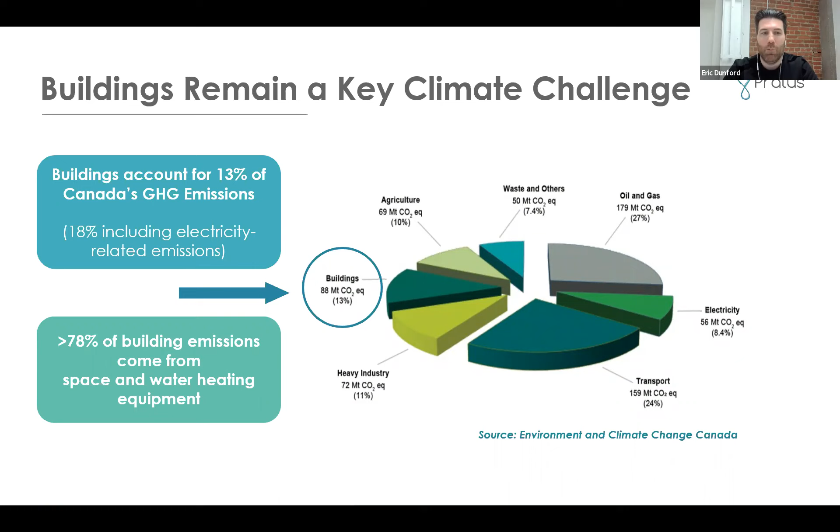So first, why is this important? Well, in Canada, buildings continue to be a very significant source of emissions. Nationally, we're looking at about 13% of overall emissions. I would say Canada has kind of a disproportionate percentage here, smaller than it is in other countries, and that is due to our larger oil and gas sector, which you can see at the upper right-hand side. So this number is seemingly smaller than it actually is in impact for other nations. Also, when you look at buildings, where the emissions are rising from, they're coming mostly from heating requirements. We are a cold country, surprising nobody.

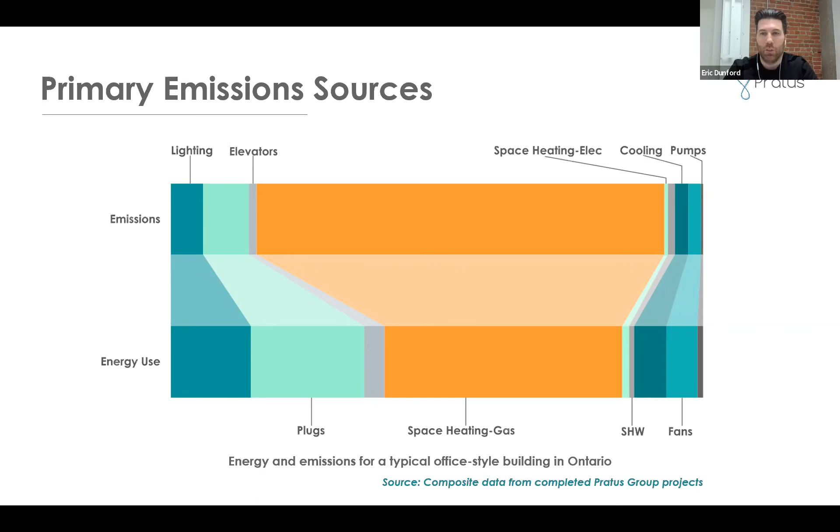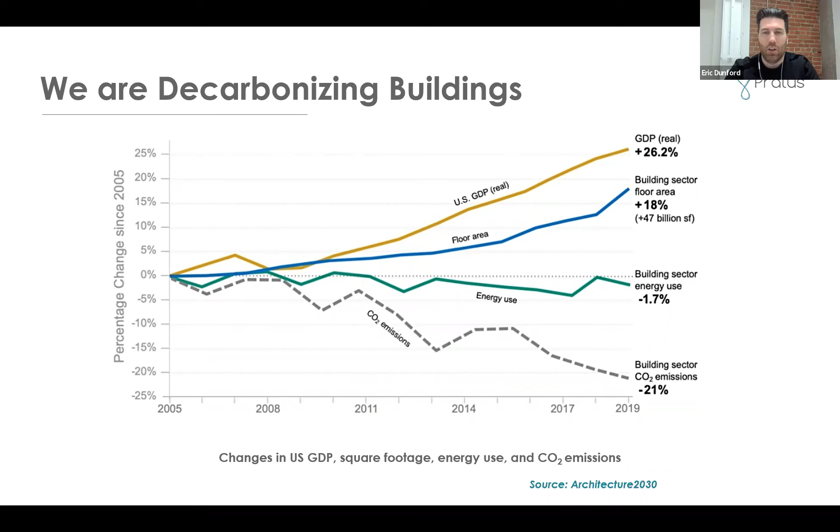If you think about 2005, things like LEED were really just getting off the ground. Over the past 20 years or so, we've seen a very big explosion in the science and the art of designing better buildings. So that's a good thing.

From a policy perspective, all of you on the line are joining from municipalities, so this is probably a world you're living in far more often than we are. But across the board, we're also seeing a corresponding increased focus on emissions reduction. In Canada, we have a federal target for net zero emissions nationally by 2050, and an interim target for 2030 targeting a 40% reduction.

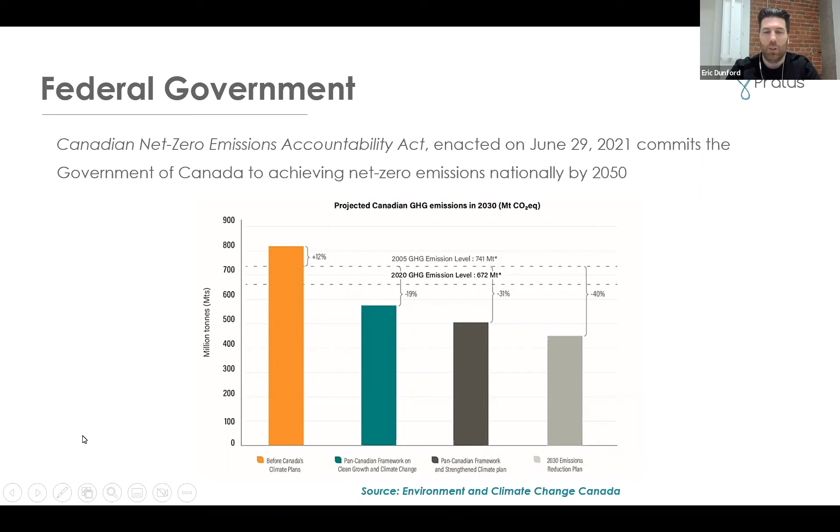You can see that graphic here, coming from the federal government. There are a number of different items in play pushing our overall economy towards that lower carbon future. Probably the most important, and probably the most painful, is the carbon pricing regime that's been implemented. We currently have a carbon pricing scheme in Canada that is national, and the numbers affixed to a ton of carbon are scheduled to rise very rapidly between now and 2030. This is the law of the land. For provinces that don't have coverage of all emission sources, the federal program does backstop, maintain, and enforce that requirement regardless. So all provinces in Canada are subject to this, and it's affecting a lot of innovation and decision making as that price of carbon starts to rise very rapidly.

Provincially, we're looking at a couple of things more on the mechanical side, in the sense that we're looking at regulations requiring public agencies to report on energy consumption and disclose that information publicly. There are two regulations here that focus on requiring public entities to talk about their emissions and energy consumption publicly, and to talk about strategies or programs being developed and utilized to pursue reductions over time. My sense is many of you on the call will be very familiar with these items, as they may be part of the roles you're playing at local government.

This is currently an interesting political dimension in Ontario, but importantly, we're also seeing different cities deploying their own green standards or carbon emissions reduction targets for all buildings in their jurisdiction. The most established, most well-known of these are in Toronto and Vancouver. Toronto is obviously more relevant for us here in Ontario, and the City of Toronto has established a goal of 2028 for new buildings to be designed without any emissions whatsoever, and 2040 as the target year for all existing buildings to reach zero carbon performance.

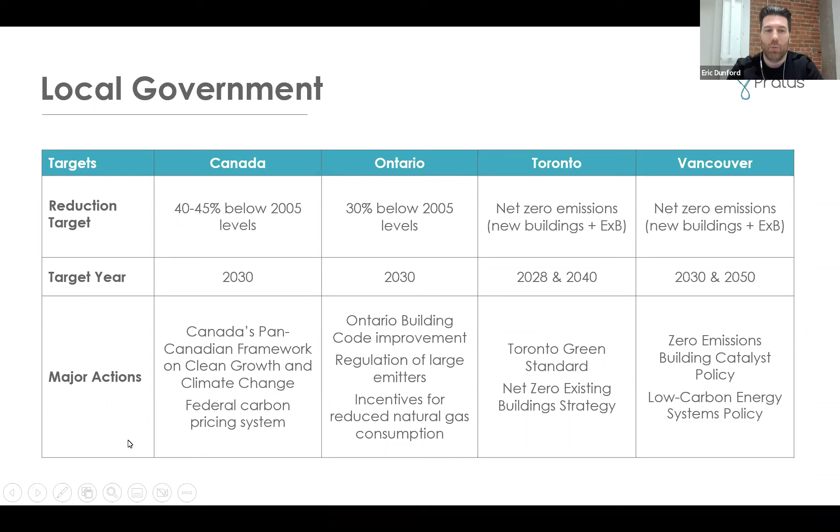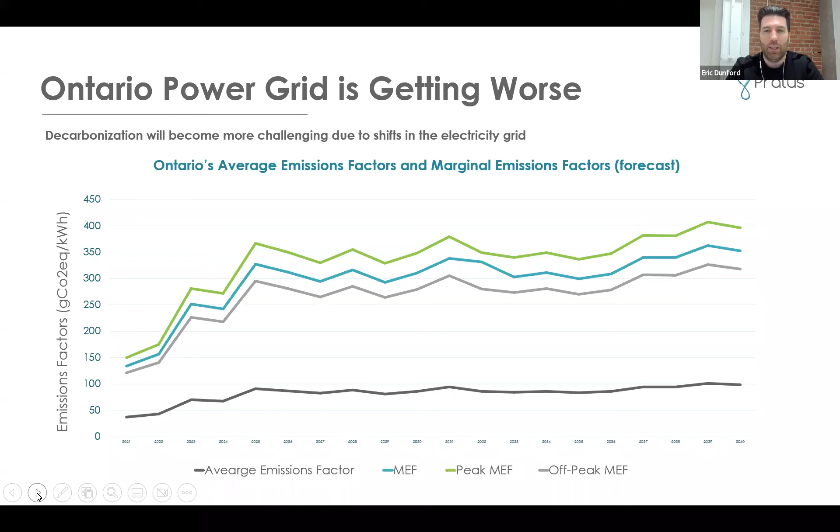Unfortunately, here in Ontario, we have an added challenge in that we have long relied on our power grid to be low carbon and to provide us plentiful energy at a low impact from an emissions perspective. What we are expecting in the future is that our power grid in Ontario is actually going to become more emissions intensive. That is because we have disruptions with nuclear facilities that need to be renovated, retrofitted, or expanded upon, and we are going to be forced to rely more on things like natural gas as a stopgap. So that's just something to be aware of—the electricity grid is also changing.

So I'm going to pass it over to Oleksandra to talk us through some of the tips and tricks and the terminology here when we talk about net zero.

Thanks, Eric. Before we start talking about decarbonizing our buildings, it's very important to get agreement and understanding on the terminology used in the industry. So I will go through some of the terms and definitions that we have, so we have a common language that we're speaking to. The first term I wanted to discuss is greenhouse gas intensity, or GHGI.

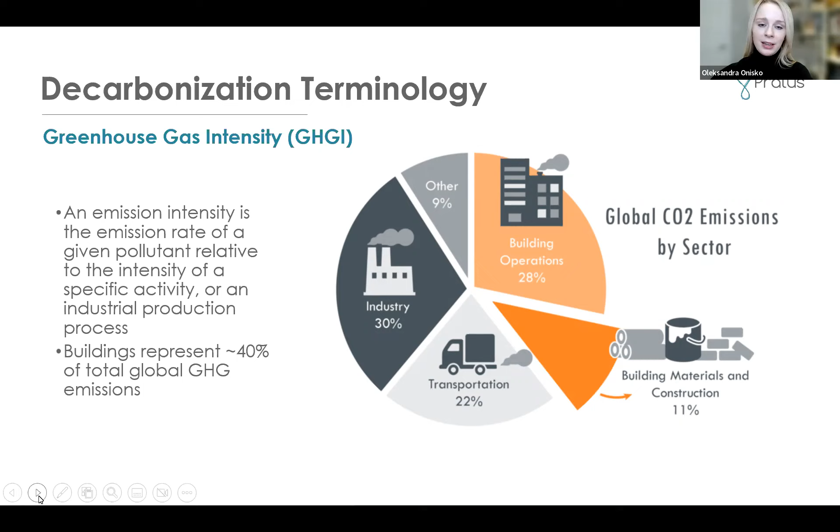Essentially, GHGI is a reflection of how emissions intense your building is. It's a combination of two factors: how much energy your building is consuming, but also what fuels are being used to meet those energy needs. As Eric alluded to, our grid is very clean in Ontario, so the more electricity we are using, the lower emissions our building has, and the more gas we are using, the higher our GHGI will be.

The second term we wanted to talk about is the total energy use intensity, or TEUI. It's referred to in different ways across industry, but this metric is the most universal of the three we're discussing. It's the one you will use for benchmarking—if you're looking to compare your building to similar buildings in a similar climate, this is the metric you use. It's a reflection of how much total energy your building uses over the course of the year, divided by the area of the building. It's a great metric because it includes every single end use, such as space heating, pumps, cooling, plugs, and any renewables you have.

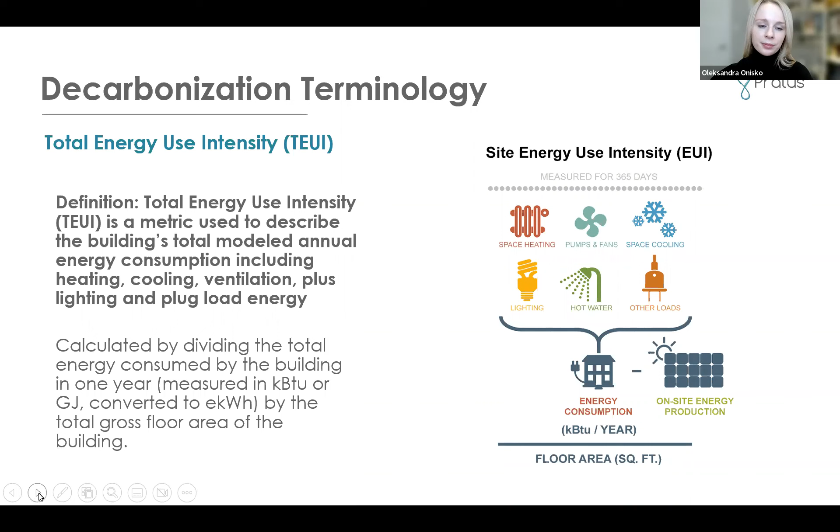But it also means you can take credit for reductions in every one of these categories. The last metric we wanted to mention is the TEDI, the thermal energy demand intensity. The TEDI is a little bit newer, and it's been widely used in Vancouver as well as the City of Toronto. It's a reflection of the heating demand your building has, and it's a reflection of two things essentially: how efficient or inefficient your building envelope is—the more heat loss you have, the less efficient your envelope, the higher your TEDI, because you're increasing the demand for heating. The second item it reflects is the ventilation in your project: how much ventilation you have, whether you're recovering it, controlling it, and so on. It's an interesting metric to balance with air quality and occupant comfort—more ventilation is great for air quality and things like infection prevention, but it does increase your TEDI if you're not treating it.

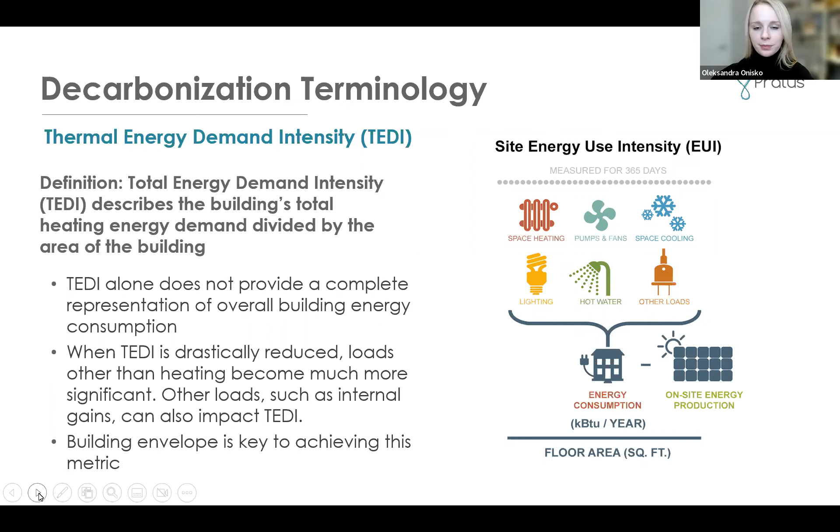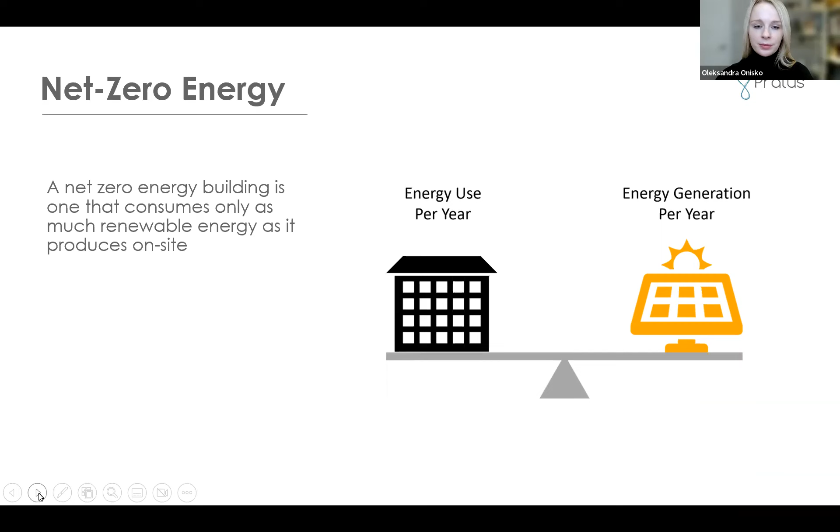Okay, so before we get into decarbonizing our building, let's talk about what the different net zero carbon and net zero energy terms mean as well. Often you hear net zero used interchangeably, and it's difficult to tell without context what that's referring to. So let's talk about some of the terms most frequently used in the industry, starting with the most stringent metric: a net zero energy building. You won't see too many of these around—a net zero energy building is consuming as much energy over the course of the year as it is able to produce on site through renewables for that particular project. Now we have a net zero emissions building, or a net zero carbon building.

This one is gaining a lot of popularity. And when you hear net zero in the context of municipal buildings and other projects in Canada, this is typically the standard that is being referred to. So a net zero emissions or carbon building is a very efficient building that starts off with a low carbon factor associated with it. But the building also produces either on-site or procures carbon-free renewables off-site to offset the annual carbon emissions. So you can think of it, you may be producing some energy on-site to offset your consumption, but if you can't produce it all on-site, for this context, it's okay. You can offset that through purchases.

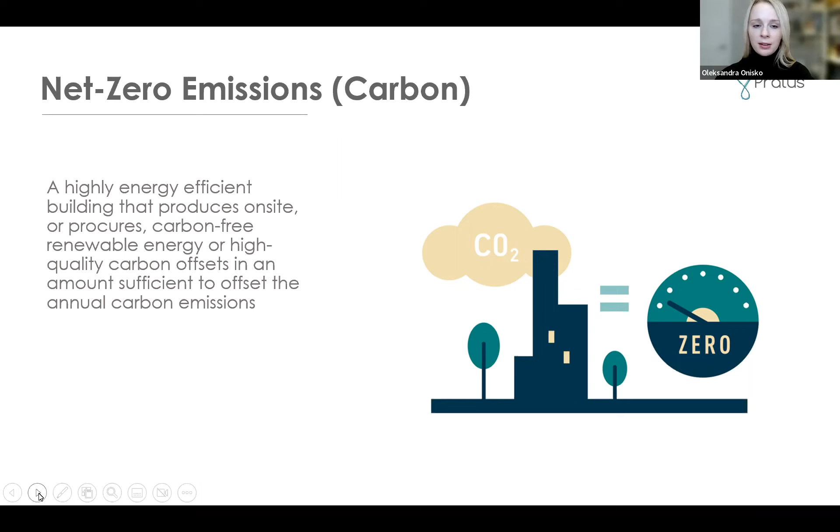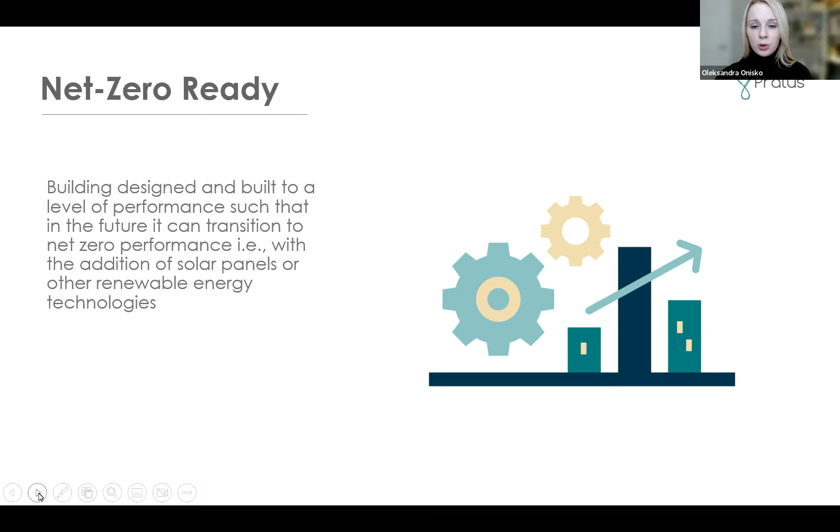And the third definition is net zero ready. So this one is a little bit more loose, but it is essentially still a very energy efficient building, but for whatever reason, it cannot reach net zero energy or net zero carbon, but it can with a future transition plan. And that future transition plan can look like eliminating all gas-fired appliances from the building, or it can look like installing some solar panels or other renewables on site just to get to those other targets.

So the most frequent standard that is used for evaluating net zero carbon buildings in Canada is the one published by the CaGBC. And the core of that standard is the achievement of a net zero balance. So this means that the net zero emissions for the building, however you balance it, will have to be zero. And this includes anything from embodied carbon, so your upfront carbon, all the carbon that's involved in the manufacture, construction, and decommissioning of your building. Your operational carbon, so that you can think of that as your utility bills, and that includes your direct as well as indirect emissions, minus any avoided emissions. So again, anything you're producing on site, as well as anything you're procuring off site to achieve that net zero balance.

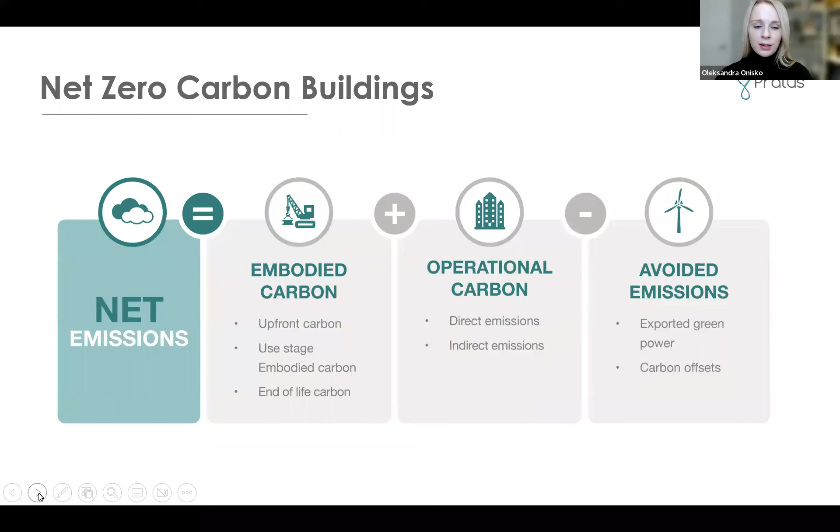And I'll turn it over to Eric to talk about some of the rationale for action. Great, thanks, Oleksandra. And yeah, as you can see, net zero means a lot of things. So being very specific here, what we're going to talk about today is net zero carbon buildings. So as Oleksandra said, you can imagine trying to supply all the energy on a site is difficult if your facility is large or if it has a very significant power draw. So we're really here talking about net zero carbon, not net zero energy, though that is a very valid and important topic as well. But let's turn our attention here a little bit to, why is it important for cities to act on existing buildings?

Well, one, as you will likely know, when you look at the general assets that cities have, their primary sphere of influence is going to be around operations that cities control. So we often hear these called corporate facilities, corporate buildings, corporately owned. And what that means is these are the buildings that a city actually has under its control and ownership. So think about things like libraries, City Hall, maybe community centers, recreation centers, parks, those sorts of things. These are assets that the city really controls without a lot of other stakeholders involved. Now, this makes them really good targets for climate action because you can do things on your own without permission from others, without necessarily disrupting or having to consult stakeholders. And that's really important. So municipal services really here are a key target for action that can be taken quickly and can be done efficiently today.

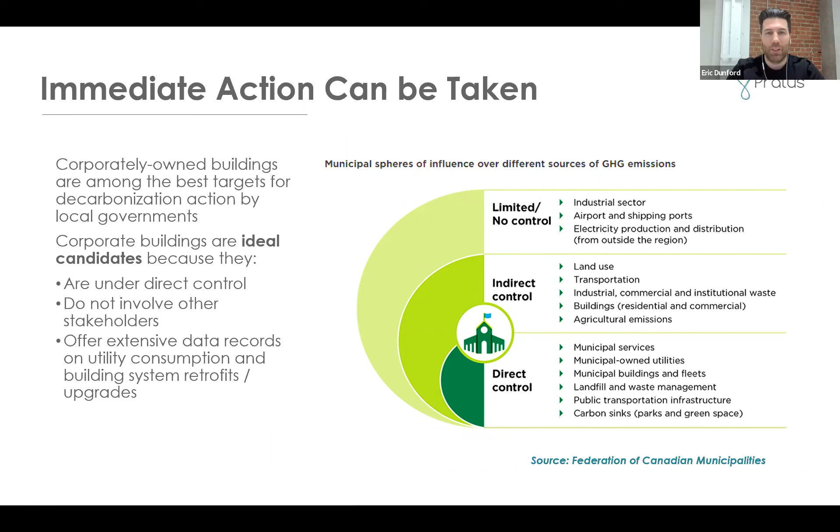So existing buildings are really critical for cities to start with because they offer a really rich target for emissions reductions. And they offer a good learning opportunity and environment where you can start to look at developing capacity internally. The other good thing about existing buildings that cities control is they typically have very good records because cities keep good records of how their facilities are maintained, what kind of energy consumption they have. So when we look at strategies for potentially decarbonizing them, all of that rich data is on hand and available for professionals to look through and to advise on. The private sector outside of all of this is much harder to influence, as we all know. So we're really focusing today again on the municipal sphere and where effort can be best applied.

And this is really important because I want everybody to understand one thing here is that most buildings that will need to be decarbonized exist today, right? So if we talk about net zero by 2050, most of our challenge, most of our problem is already in the ground. It is the buildings that are drawing power, that are burning natural gas today.

And what a lot of studies have shown is that even if we were to switch over to net zero new construction for all buildings, as you saw with the city of Toronto targeting 2028 for that, it's not going to do enough to decarbonize the overall building stock. We have to do this for existing buildings.

And in British Columbia, they did a study where they looked at what the impact of their stricter building code requirements would be for new buildings. And they found that even with these very strict new programs coming into place that would govern construction of all of these new buildings that are going to be built in that province, they might only achieve about a third of the overall reductions that they need to achieve in the building sector.

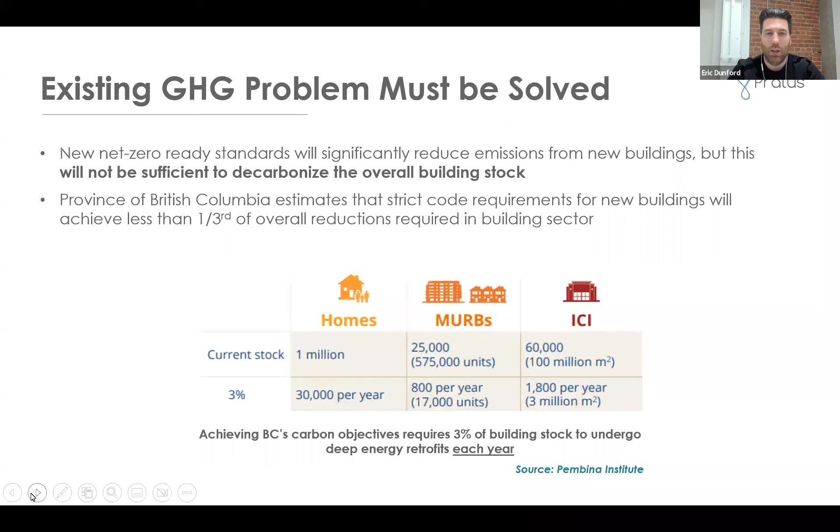And the other thing here is that, as public entities, the public sector does have an interesting role to play as somebody who is setting the example again. So we want to talk about influencing the private sector or the community. Public buildings are very high profile. They are accessible to all, and they are representations of community values and overall policy objectives.

So these buildings, because of being highly visible, being accessible to many, their performance can set a very important standard for other parts of the community and other developers or other property owners. And this far outstrips the percentage of their contribution.

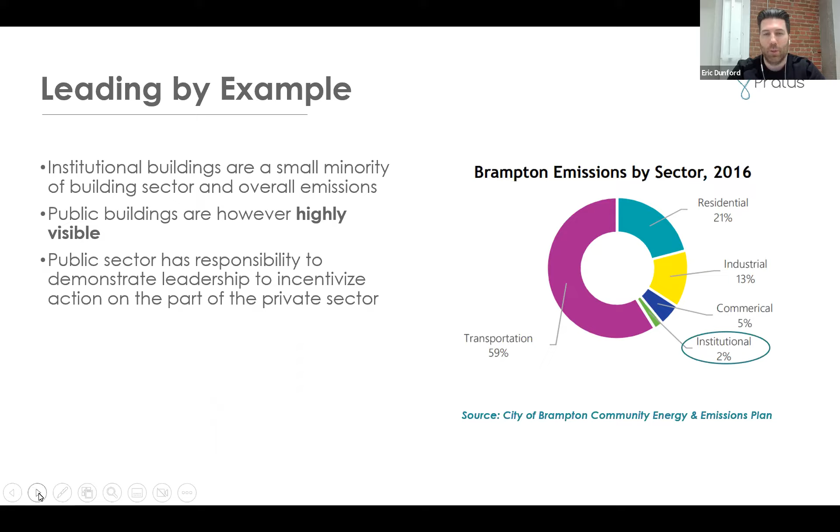So that's really what we're here to talk about and why we see this as such an important part of municipal action. So Oleksandra, why don't you walk us through the actual methodology? We've talked a lot about the why and the what and the terms. Let's walk through what this actually looks like in practice. Yeah, absolutely.

So the task of decarbonizing a building may seem daunting, particularly if you're looking at a portfolio of buildings and you're trying to establish a strategy and a roadmap for how you will approach this. So we've identified 6 key steps that are generally taken when we are looking to decarbonize a portfolio or a group of buildings. The number 1 step is to determine which buildings we need to focus on.

So assessing your portfolio. Different buildings in your portfolio may have very different emissions. You may find that 80% of your emissions are actually coming from only a handful of buildings. So that analysis will give you the tools to make your decisions in the next steps. So once you identify your high priority buildings through assessing the portfolio, it's very important to start building a business case for these retrofits and decarbonization strategies. We'll talk a little more about that in the next few slides, but let's just cover the rest of the process.

The next step is typically studying the options. So once you've identified your building, you've sold the business case to the stakeholders that need to be sold on it, we're figuring out, okay, what are we actually going to do? So typically consultants are engaged and brought in, mechanical, electrical, architectural, sustainability consultants, and they are assessing the different options that you have for the decarbonization strategy.

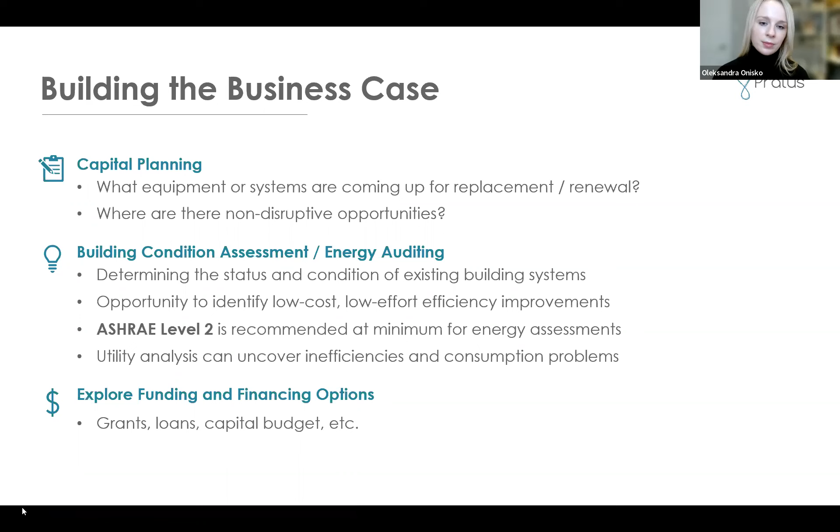Okay, so let's talk about what a study looks like, because again, this is a very important part of a decarbonization strategy. It really gives you the roadmap of what actions you have to take, when you have to take those actions, as well as how much those actions will cost for your particular building.

So in every single study that is undertaken, it's very important to establish the goals. The goals may be different based on your particular project. It may be different based on the municipality. It may be different based on the particular use of the building. There's different priorities that have to be weighed, but starting with a common set of goals for the project is essential in any decarbonization study.

The second step is making sure you understand the building in detail. So that can look like site visits, extensive document reviews, interviewing the operators, interviewing the stakeholders for the building, as well as the occupants. And that will all be taken by your sustainability consultants, and they will develop essentially a digital twin of your particular project. And your project can be either a single building or it can be a group of buildings.

And what is done in that case when we're creating a digital twin is essentially a calibrated energy model that reflects how your building is built, how your building is operating, the various efficiencies that you have in your building. So it's a representation of what you're working with.

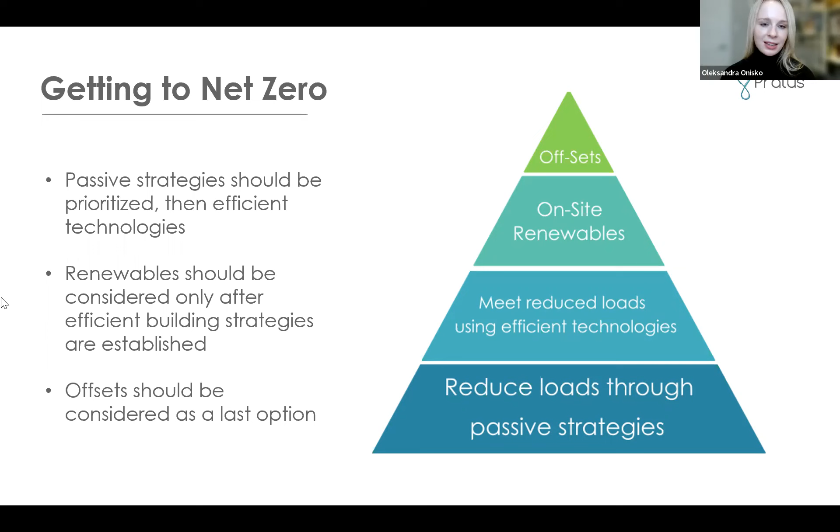Reducing the loads through passive strategies is the number one biggest influence you can have on your project. This should be the basis of every decarbonization project, and it will look different depending on what you have in your building. The number one method is to address your massing, which may not be possible if you have an existing building because it's already in place. Things such as orientation, building shape, and the site—you may not have influenced that for an existing project. However, for new construction, this is of paramount consideration when establishing our approach.

However, things you can influence in an existing building include your building envelope. We reduce loads through the building envelope by insulating it more, having better thermal bridges, and making sure we address any infiltration issues, so that our building and mechanical system does not have to meet a ridiculously high building load because we have not addressed the number one item of importance, which is our building envelope.

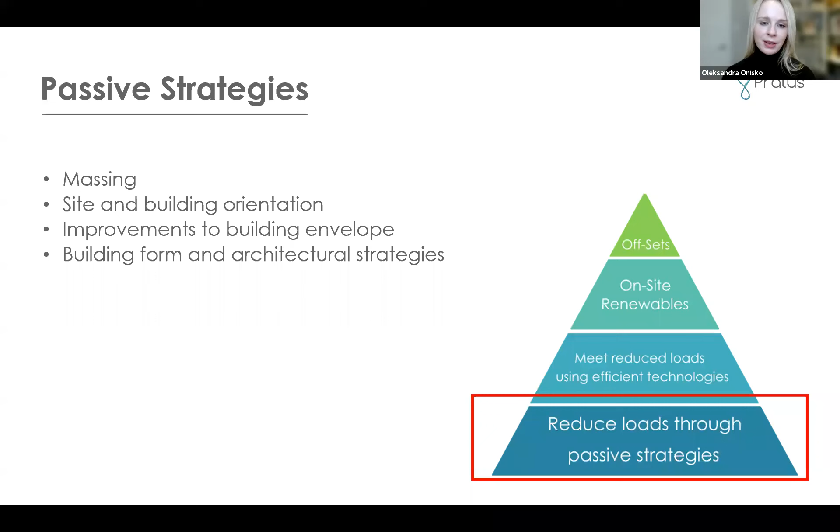So I mentioned insulating, which I think, when you're thinking about the building envelope, is the number one item people think about. They want to add more and more insulation. However, that's only one portion and aspect of thermal performance of the building. The other aspect that has been frequently ignored is the thermal bridging effect. You may look at a wall and hear that it has an R value of 20 or 30 or 40. When people mention those values, those are typically nominal insulating values.

So that's essentially you put in some rigid insulation in there, and that's the value it would have if it existed in isolation. Unfortunately, this is not what our building envelope looks like in real life. We have many interruptions to the insulating layer in the real building—things such as studs, fasteners attaching your cladding systems, breaks in insulation, and linear interfaces such as your window wall transition, balconies, slab edges, and parapets. All of these are opportunities for energy to escape your building because we have a discontinuity of insulation.

So when we talk about decarbonization strategies, it's important to think about these in conjunction with how much insulation you're putting in, but also how you're addressing these thermal bridges. This is something your architectural consultant, building science consultant, or sustainability consultant can help you with. And it doesn't necessarily mean high cost premiums—sometimes it just involves careful detailing of how we are approaching the design.

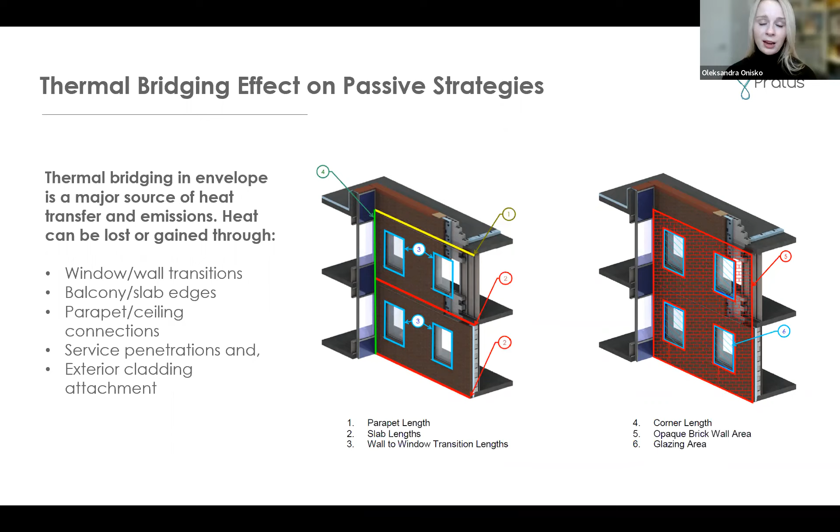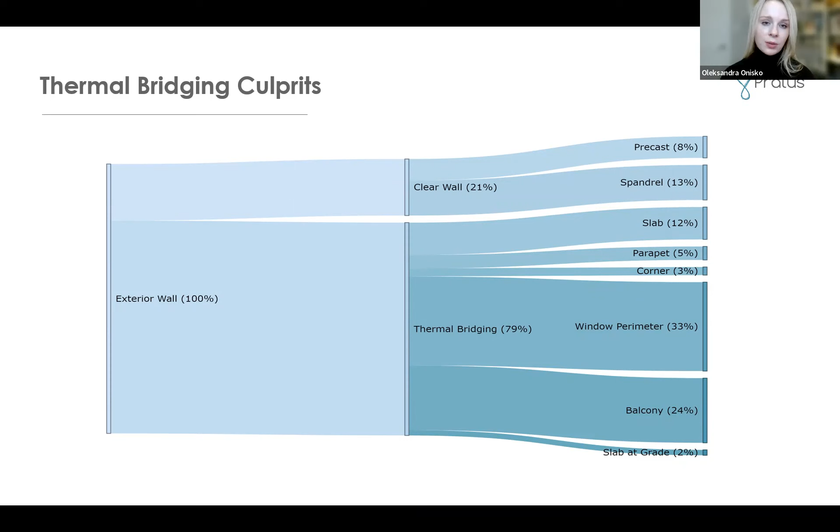The second step, after we've reduced our loads through these passive strategies, is to meet these hopefully much smaller loads with very efficient technologies. What that looks like will differ based on the loads you have, but generally it's addressing the active systems in your building, such as your mechanical systems.

Typically what we look at is replacing natural gas-fired equipment with heat pumps of all types—air source, ground source, sun source—trying to recover any energy from outside the building and bring it inside as much as possible.

Replacing our domestic hot water with more efficient equipment is also important. For decarbonization strategies, that often means changing gas-fired equipment out for heat pump systems—again, air source, ground source, sun source. This also looks like improving our building automation and control systems, which is very important. As we like to say in the industry, the most efficient system is a system that doesn't run. If you have the ability to control that within your building, if you have variable occupancy or rooms not occupied all the time, there are opportunities to shut down mechanical, electrical, and other systems in response to that decrease in load. There's a lot of opportunity within building controls to gain efficiency.

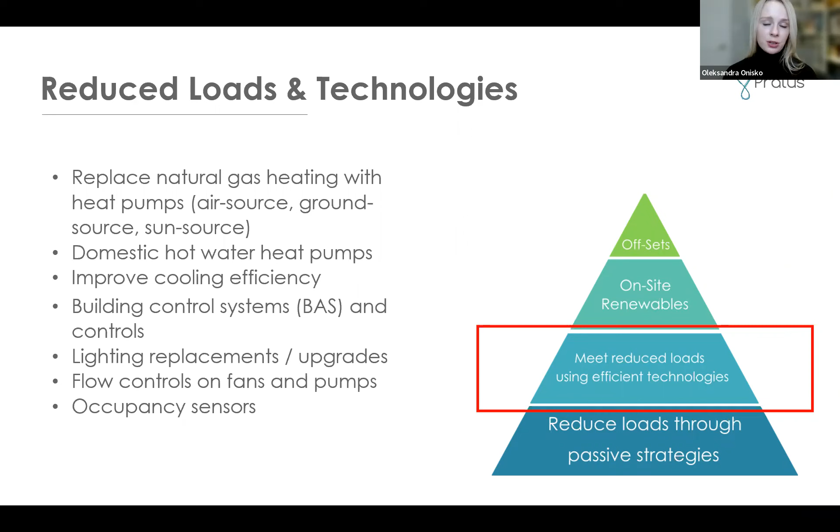So one item we wanted to talk about again is the resources available for these technologies. We've flagged the City of Toronto Net Zero Existing Buildings Strategy as one resource that outlines some of the common technologies used in decarbonization strategies, as well as their typical impact in reducing carbon and the typical costs associated with it.

Things like that are really good rules of thumb and quick guidelines to refer to on projects when looking at suggestions on how to best approach technology and efficiencies in your building. One item I'd like you to take away from this presentation is heat pumps, heat pumps, heat pumps. If you remember anything for mechanical systems, this is key. These technologies come in different shapes, sizes, forms, and methodologies depending on building size and application, and they have the opportunity to drastically improve your emissions.

So the primary method they do that is, number one, they fuel switch. Instead of using combustion equipment to generate heat, you're essentially taking heat from one source and moving it to another, possibly increasing the degree of heat, and you're using electricity to do that. So it's two things happening at once, and the result is much better performance in terms of energy and carbon, and frequently lower operating costs as well.

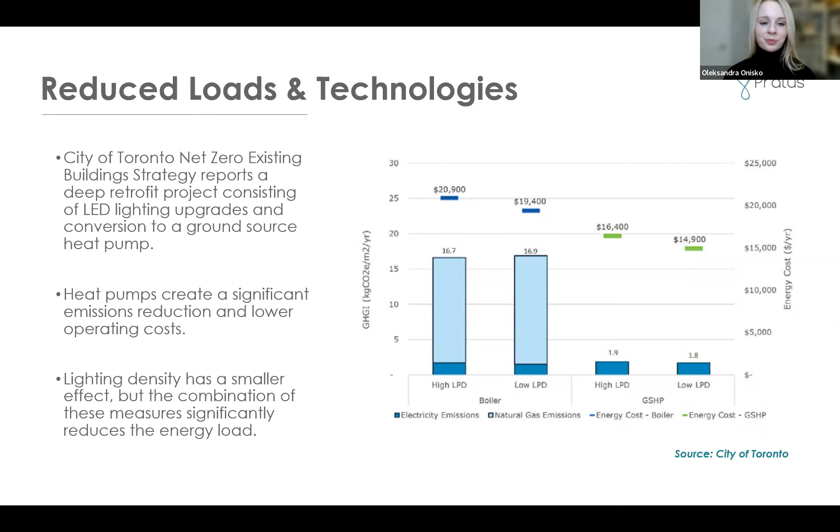Okay, so the next item we address once we've reduced our loads and met them efficiently is on-site renewables. On-site renewables will look different depending on your project, but I'd say 95% of the projects we work on, it's solar PV. Now we're not only seeing solar PV on the roof, but also in parking structures, as projects look to meet more of their energy needs through on-site renewable generation. We're looking beyond the roof to what can be done with parking structures.

One technology we've seen emerging is building integrated photovoltaics, where you use the vertical surfaces of your walls to generate electricity. That technology has come a long way, and it's great to see it picking up in the industry. Other sources of renewables on site are non-traditional ones, such as solar water preheat, solar fresh air preheat, renewable natural gas—which isn't widely available depending on locality, but is an option for some projects—as well as wind turbines and geothermal systems.

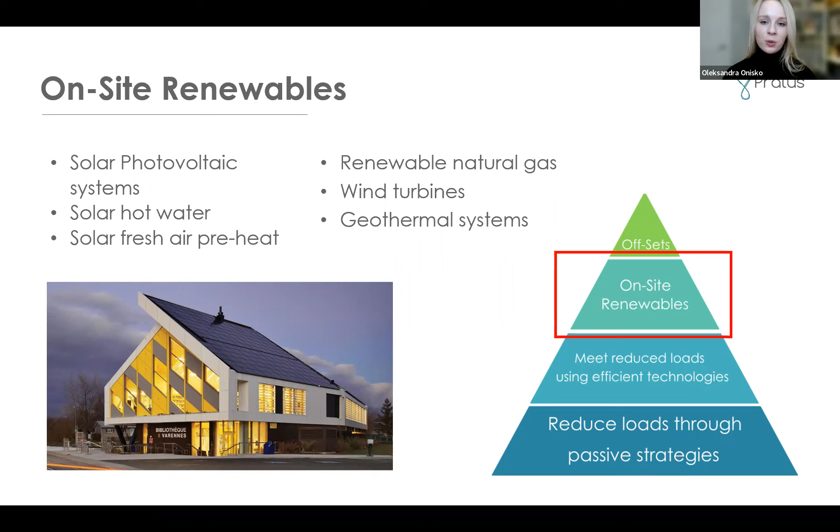And the cherry on top of this pyramid, as we like to say, is our mechanism of last resort. Once you've exhausted all your strategies from the previous three rungs of this pyramid, this is the last one you'll be looking at: the purchase of offsets or credits. This is a financial commitment you'll make for the life of the project to essentially meet that net zero carbon balance on an ongoing basis.

There are a few options for this. You can either purchase offsite renewable energy generation—think of the more common ones, like Bullfrog. You can even buy that for your house, so that's an option, and there are a few different providers out there you can purchase this from.

You can also pay money in exchange for carbon removal technology, essentially giving someone funds to invest in a carbon sequestration project somewhere not on your site. Or you can fund forestry projects and other natural carbon sinks—think of this as paying someone to plant an acre of forest to offset a certain amount of carbon for your project that year. So there are different options available.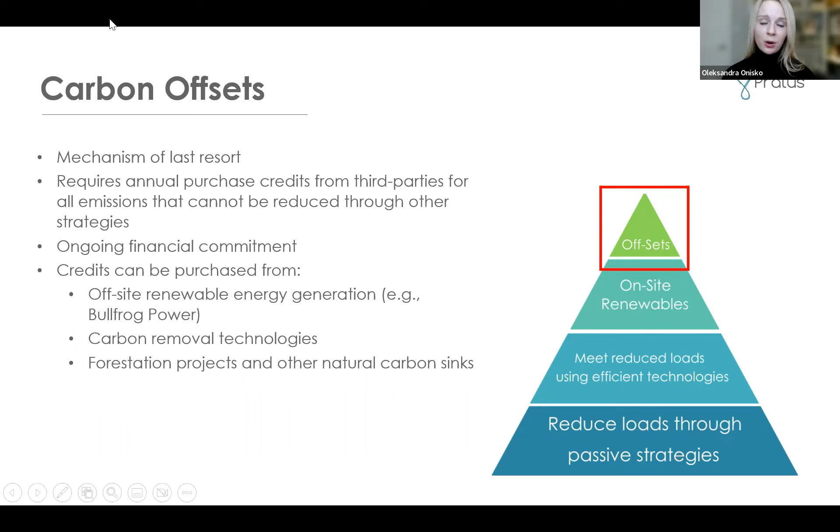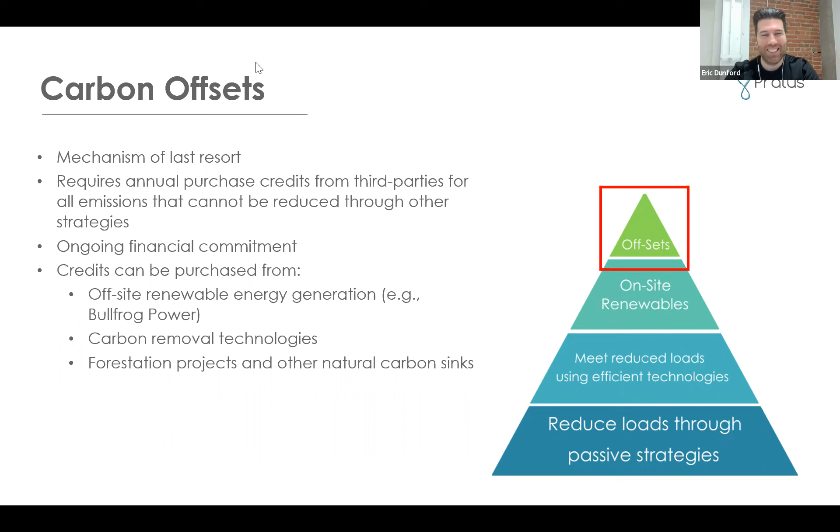Okay, so that was a lot of material to cover, but what we want you to take away is these best practices. This is sort of the cheat sheet to decarbonization for any building.

Number 1 is reduce your loads through building envelope improvements, more insulation, better thermal bridging, addressing infiltration. Number 2 is implement energy recovery ventilation and demand control ventilation on your fresh air loads. This plays a part in reducing our loads. We want to make sure we are addressing our ventilation loads, which are very high in a heating dominated climate. We have to heat every CFM or cubic meter or cubic foot of air that we bring into our building, so any way we can reduce that is fantastic.

The third item is to implement a low carbon mechanical system. This is heat pumps, heat pumps, heat pumps. If you remember one thing, this is it. And not to be forgotten is retro and recommissioning of the existing system and commissioning of new systems. You can implement any system you would like, and it can be the most energy efficient system, but if it is not operated properly, if it is not balanced properly, is not set up properly, your system will not deliver the energy savings that it should. So it is extremely important to recommission and retro-commission any existing system, and also to have commissioning on any new system being installed. And the last item is any renewable energy generation you can put in on site is great.

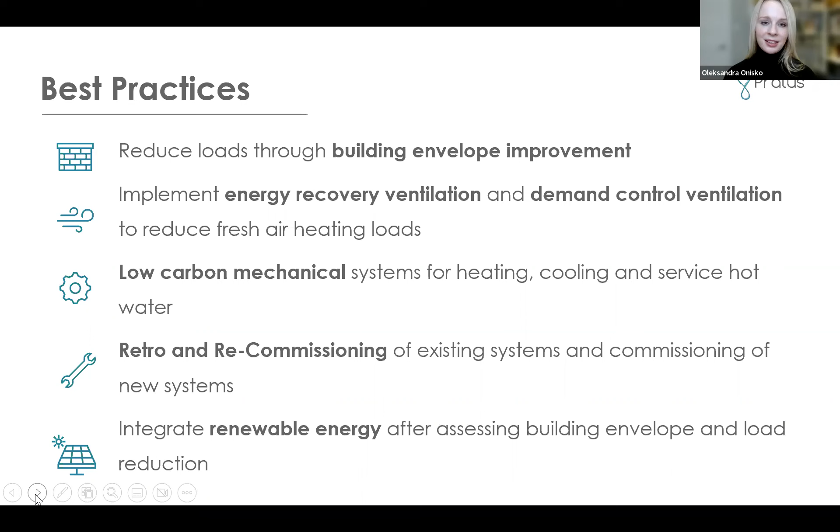So we wanted to have a little sidebar just on this heat pumps, heat pumps, heat pumps theme, and talk about the different mechanical heat pump systems you can have in your building. This is what we're seeing as being very successful in a lot of decarbonization projects that we come across. Heat pumps are a very low carbon system to begin with.

There are different options. You can have water source heat pumps. You can have water source heat pumps with geothermal. So essentially you're using some sort of liquid in your building that is circulated, and then you can either extract or reject heat to it on the space level or centrally.

We have our variable refrigerant flow, or VRF, systems, which are also a type of heat pump, and that can be either combined with an air system, so without a hydronic heat source or sink, or it can be a water source heat pump, and that can be combined with low carbon heating and cooling, or combined with a geothermal system. And air source heat pumps is general—those can either be centralized systems or distributed systems, again depending on your project.

All of these are excellent options for both new construction and particularly decarbonizing existing buildings, and they will be applicable to one degree or another in any strategy we consider. The goal is essentially to eliminate natural gas within the building as a whole. This is where we're heading as an industry.

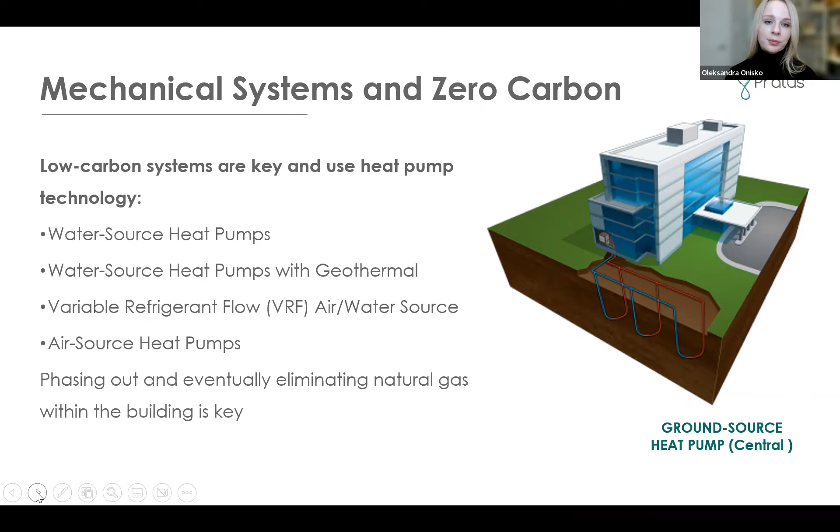Okay, so let's talk about some of these case studies. We talked about a lot of these sort of abstract ideas in isolation, so let's see how they all come together in buildings that we have worked on.

The first example we wanted to speak about is actually a new construction building, but because this is a fairly common municipal archetype, we thought it'd be important to talk about how we addressed a low carbon design for it. This building is a fire and training facility in Southern Ontario. It provides emergency response services, with 3 fire bays for the fire engines, a facility for firefighters to sleep and receive training, and a small administrative office.

This building archetype has in the past been fairly challenging to address in terms of energy efficiency. We have these huge doors that are open a lot of the time, and then we have to heat the space inside that they're open to—it's been a challenge in past projects. However, for this project, energy efficiency and particularly carbon reduction was identified as a very important goal. This project was actually pursuing funding through the Federation of Canadian Municipalities program and was successful in obtaining both a loan and a grant in recognition of its energy efficiency.

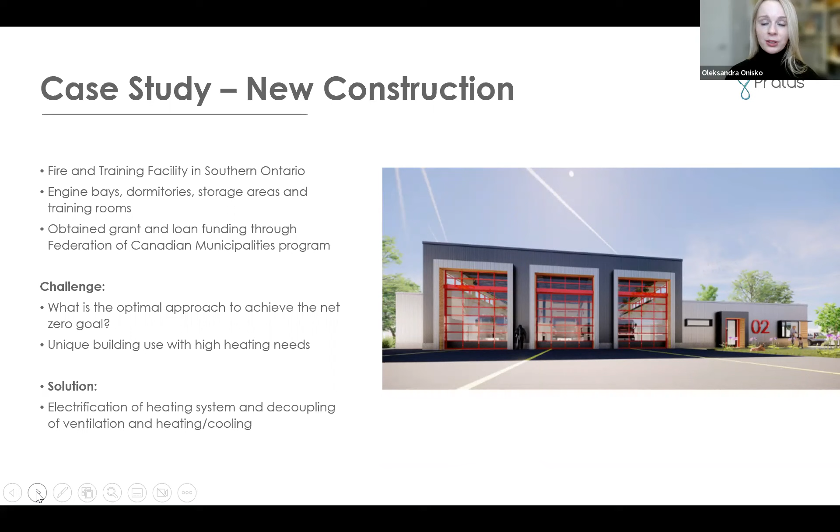The second example we wanted to bring to your attention is a retrofit and addition project. This is a police station located in Southern Ontario that contains offices, detention areas, and training rooms.

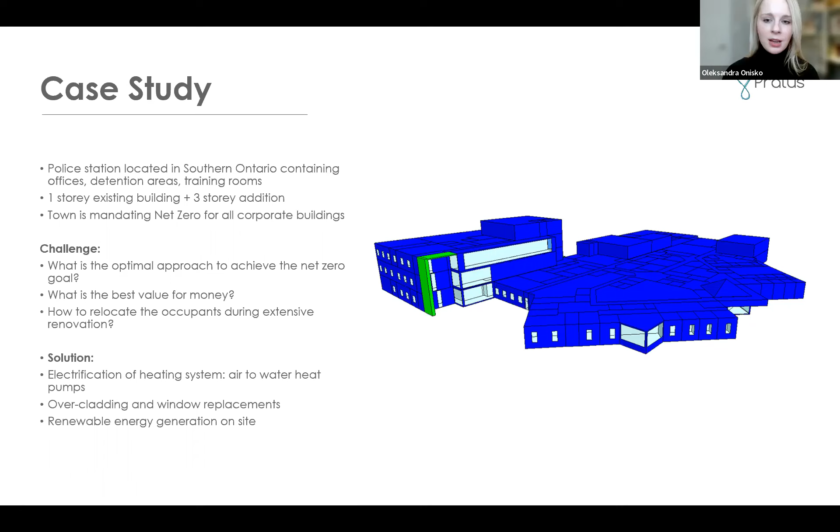They needed to make some changes... three-story. Are we losing Oleksandra here? Okay. Yeah, you can hear me though. You can hear me still? Yeah, I can hear you. Oh, she's back. Okay, all right, you're back. We'll give you another go, and if not, Oleksandra, I can take over from here. Oh okay, I'll stop my video. I think that should make sense. Can you repeat the slide? I think it started glitching on this slide, Oleksandra.

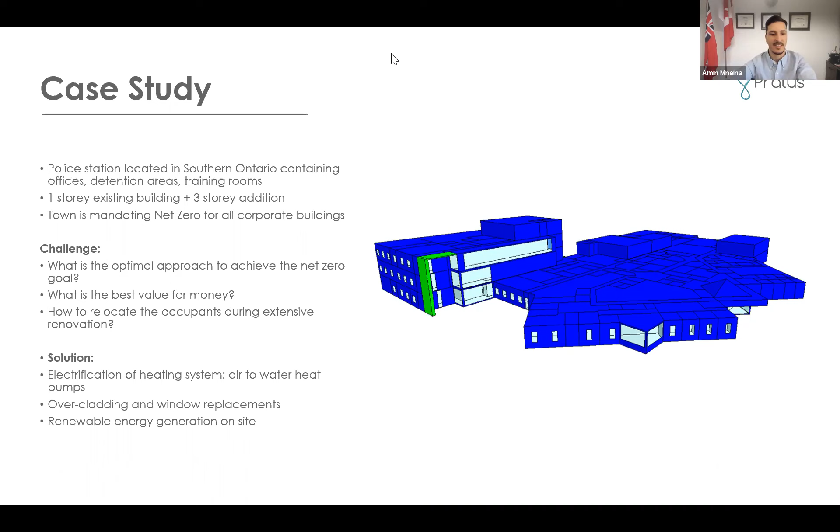Thank you. Yes, so this is the second case study we wanted to speak to: a police station located in Southern Ontario, containing offices, detention areas, training rooms, and other support spaces such as storage areas for the occupants.

The existing building was one story and was coming to the end of its useful life, looking to have quite an extensive retrofit, motivated not only by energy but also by the changing requirements of the occupants and the different use types they had to accommodate. The project also contained a three-story addition.

The town had recently mandated that it wanted to see net zero carbon for all corporate buildings, so we conducted a study for this facility to figure out how it could get there. We had quite a few challenges addressing decarbonization at this building, mainly figuring out the optimal approach to achieving net zero and what that looks like in terms of best value for the money.

Of course, this is a municipal facility, so we want to make sure we're spending tax dollars in the optimal way to achieve the required outcomes. A big part of the challenge for this building was how to do this extensive renovation while supporting the services the building has to continue to deliver. What do we do with the occupants during the extensive refit? What was the solution for this building?

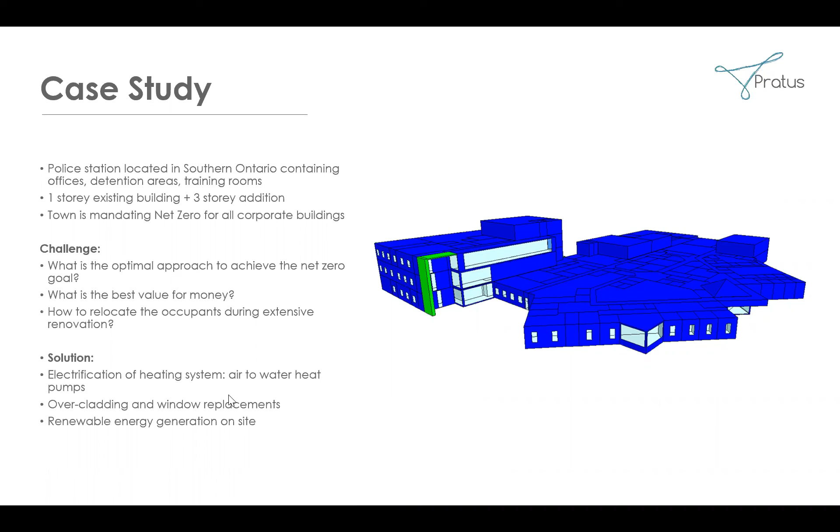And the last case study that we wanted to talk about is a federal building that's located in the National Capital Region. So the federal government has been sort of spearheading this push towards decarbonization for a lot of its federal facilities. It's been doing decarbonization studies, I don't know, Eric, probably for almost a decade now that we've been involved with. So they were a little bit ahead of the pack, so to say.

So this particular building was a building that they occupied. It was built in the 1960s. It was 13 stories. And the tenant, which is the federal government, mandated that they must reach net zero emissions by 2030 for this building because they are occupying it. So this was quite a challenge.

This building was not very well performing to begin with, built in the 60s and not really touched since then for the most part. So the building envelope was really lacking. The mechanical systems were out of date and certainly not in line with where we need them to be for decarbonization. But all the other challenges that we frequently see, such as, how do we make this make sense for the budget? What do we do with the occupants? How do we best implement these systems? All of this arose. Next slide, please.

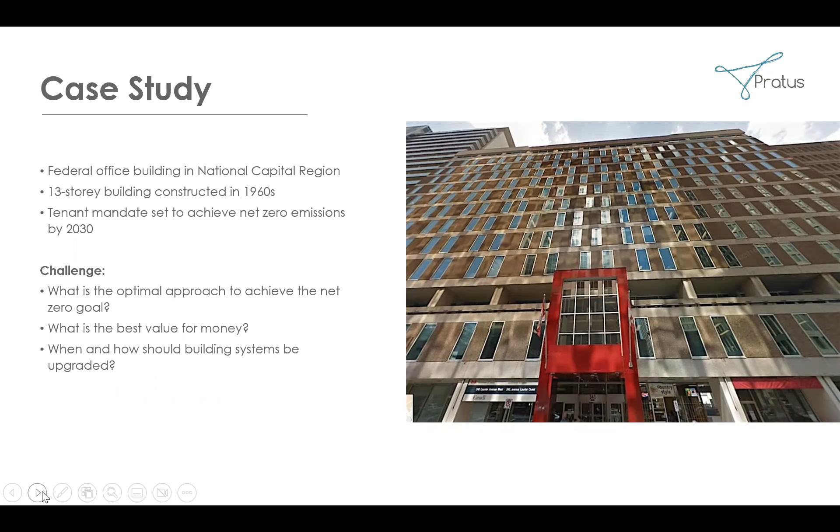So for this project, we actually took a look at several different options. When I was talking about the process for decarbonization, I mentioned that the report as the final deliverable for the study may look like one strategy, or it may look like multiple strategies depending on the client's desire. So in this case, the client wanted to see several approaches to carbon reduction, and that looked like having a cost neutral carbon reduction strategy, a maximum GHG reduction strategy, or sort of the sky's the limit one, no budget constraints, as well as an optimized GHG reduction strategy.

So this is, I like to think of it as, what would you do if this was your building and you had the constraints on the funding that everyone has, as well as a tailored reduction strategy. So the tailored reduction strategy is really what the building should be moving forward with based on the previous 3 strategies and sort of balancing the different pros and cons of each.

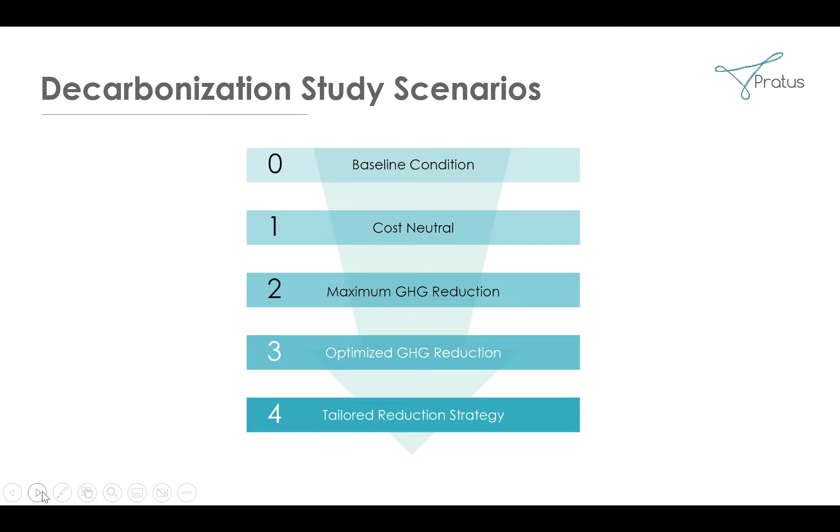So we evaluated the different strategies and the impacts that they had on all of the metrics that we had previously discussed. So our EUI, our energy use intensity, our TEDI, and our GHGI. And you can see that all of the scenarios, so scenario 1, 2, 3, and 4, had very similar results for our GHGI actually, but they had significantly different impacts on our costs. So that was very important to consider as we were proposing our tailored strategy for this particular project.

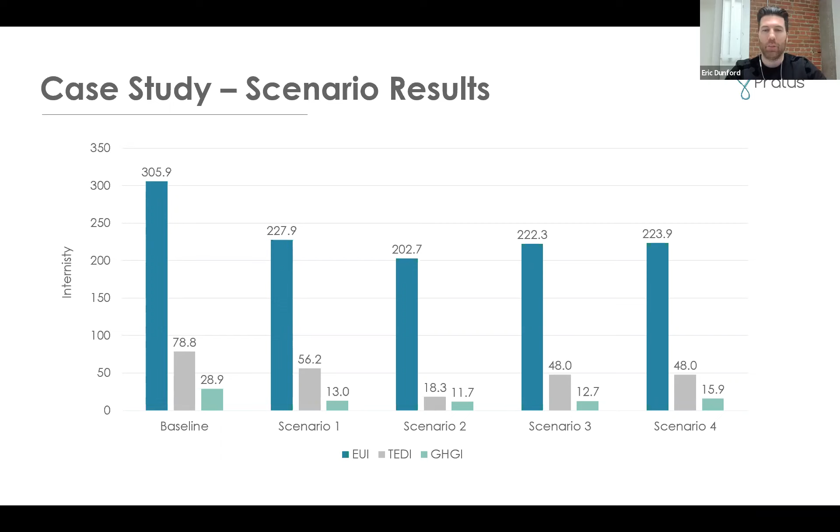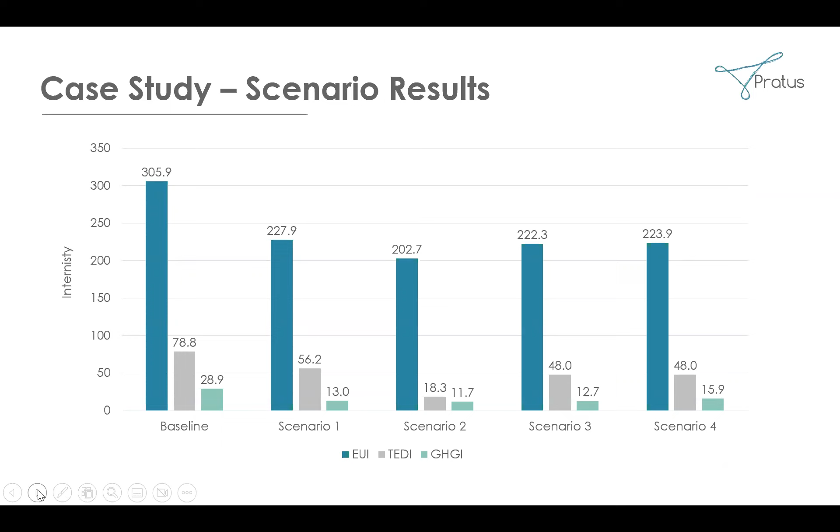And I think an important comment here, Alexandra, too, right, is that under all of these scenarios, you are not seeing net zero GHGI, right? So again, pointing to that pyramid, and the fact that even when you deploy all of these strategies, there may still be emission sources that are difficult to remove. Absolutely. And this is something that you will see for most of the projects out there. It is very challenging to achieve absolute carbon neutrality with the constrained site conditions that we frequently have for existing buildings.

Okay, and then talking about how did we evaluate these scenarios? So as I mentioned, there were 4 scenarios and they sort of had different goals within them. And the metric that we use to evaluate them is the 40-year life cycle cost. So this life cycle cost included everything from our initial cost, so how much is it costing to buy this equipment and install this equipment on day 1. It included our energy cost as well as carbon cost.

So it's very important to highlight that carbon cost is also coming into this metric when we're calculating our net present value, because that will look like different things for different systems that we're using. This also included our equipment replacement costs, so what does it look like for the different proposals that we have, as well as our operation and maintenance cost. So we really evaluated all of these based on the NPV.

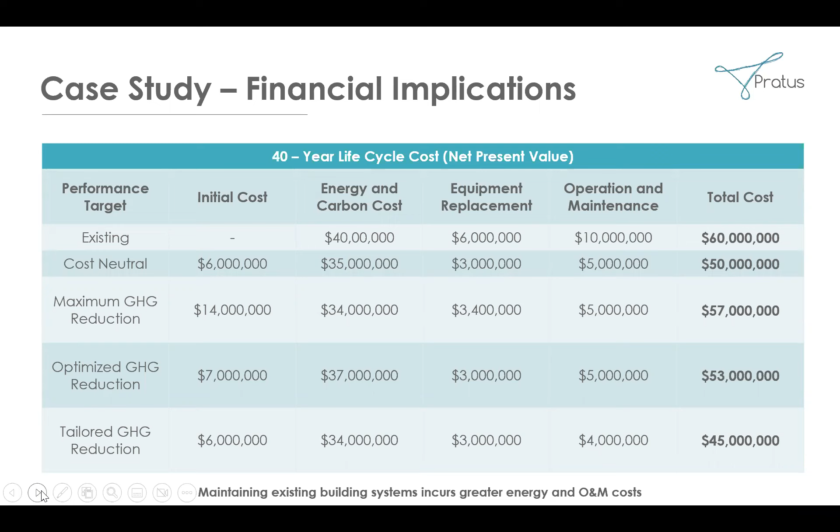And as I mentioned, the strategy that we put forward as a recommendation to the client was our tailored GHG reduction strategy, which was the best of both worlds. That achieved significant GHG reductions, but you can also see here, these have been changed a little bit, that it did achieve the lowest total cost, despite actually having the same initial cost as our cost neutral solution. So that's very good to see, because you really see the effect of our energy, carbon, replacement, and operation costs coming into that equation.

And this is what the decarbonization approach looks like when it's tailored. So when it's a tailored approach, what we typically see is that the approach and the different phases of the approach are aligning with our capital plan. I think I mentioned earlier in the presentation, things you can look at are, when is your equipment coming to end of life? When is your building envelope coming up for renewal? At those points of intervention, you will have buckets of money that's already available and allocated to some form of capital investment. And it's important to align those with any decarbonization strategies that you may have, just to build that business case, going back to making this more palatable for the municipality, for the particular project, and any other stakeholders.

So for this project, that phased approach looked like sort of 3 distinct steps. The first one being an energy reduction in the short term, partial fuel switching in the medium term, as well as a full deep energy retrofit and a full fuel switch later down the line, when that better aligned with their capital planning.

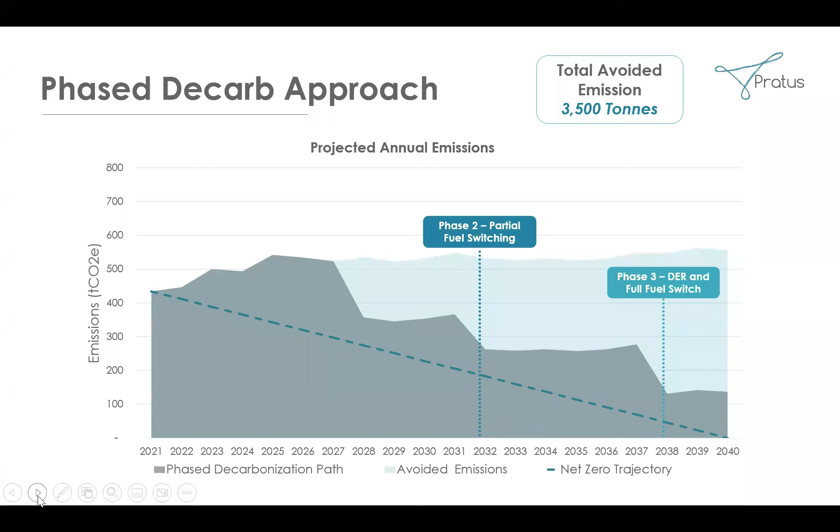And you tend to actually get a more efficient building than you would have by implementing these measures in a phased approach. And the reason for that is you really get the opportunity to right size a lot of the equipment that you're putting in. You're taking advantage of your building envelope improvement, infiltration reduction, ventilation reduction, and so on. And then you can have responsive equipment and sizing based on that, and that really results in a more efficient building.

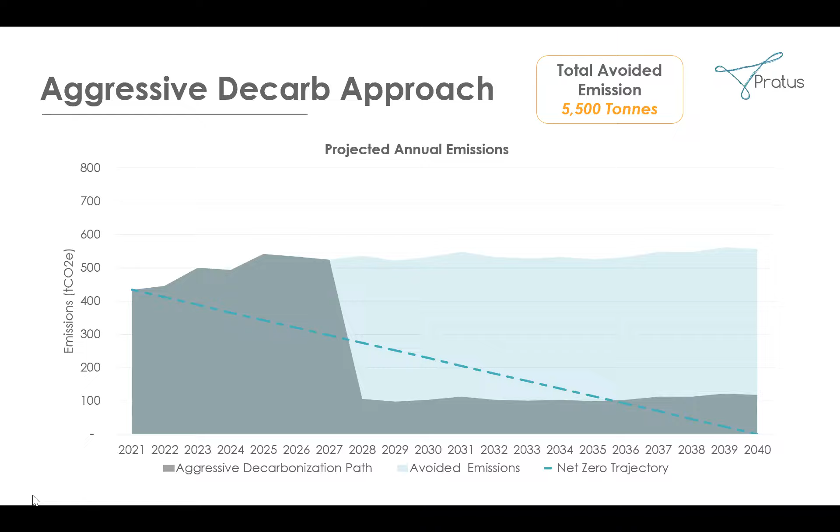Great. So thank you, Alexandra, for that deep dive. I'm going to spend a few minutes here talking about barriers and talking about some funding opportunities, and then we'll turn it over to any questions. I see there's a few that have come in as we've been speaking, so we're going to address those shortly.

So let's talk about some barriers. Let's be realistic, right? We're talking about local government, we're talking about municipalities. The biggest barrier, of course, is financial. So as Alexandra was saying there, it's costly to do these things. Some of these buildings have not been touched in a long time. Unfortunately, I think we all know that it is difficult for the public sector to spend money on its own facilities due to concerns from taxpayers, due to extreme sensitivity around spending those dollars. And I think there's many reasons for that, but the key thing here is that it can be challenging to both just maintain buildings as they are, but also acquire funding for these very significant retrofits or changes.

So I did want to share a little bit because I had a really good conversation with some of the leaders at the town of Whitby yesterday. And if you look at their Zero Carbon Whitby plan, which is a great plan, you can see that they're looking at all of their corporate assets. And what they've identified is that they need approximately $40 to $60 million in order to be able to actually decarbonize those corporate facilities the way that they believe needs to occur. So 40 to 60 million is not a small amount of money for a community the size of the town of Whitby. But they are also proposing a really innovative solution to this.

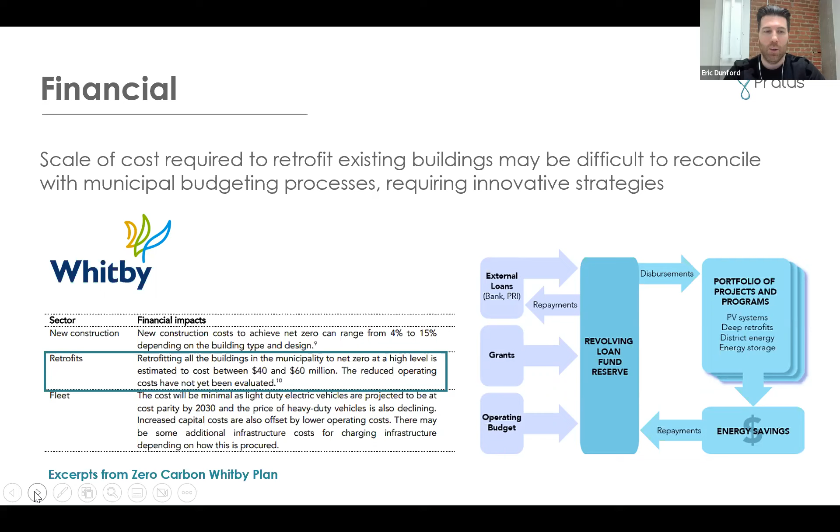The other problem, which Alexandra spoke to, especially with the EMS or police or other types of services like that, is that a lot of public buildings, we just can't shut them down. We're talking about buildings that serve as warming or cooling centers. Often they're the only place of refuge for members of our community. Some of them are performing really crucial services that they really cannot stop operations. They're operating 24 hours a day.

So how do you take a building like that and how do you actually create these changes in real time? And there's a lot of logistical challenges with that, and we will not undermine that at all. I mean, really, this is a huge challenge for these buildings. A commercial office building in downtown Toronto is kind of easy. People can work from home. You can maybe find some alternative hoteling arrangements for them, but that's really it.

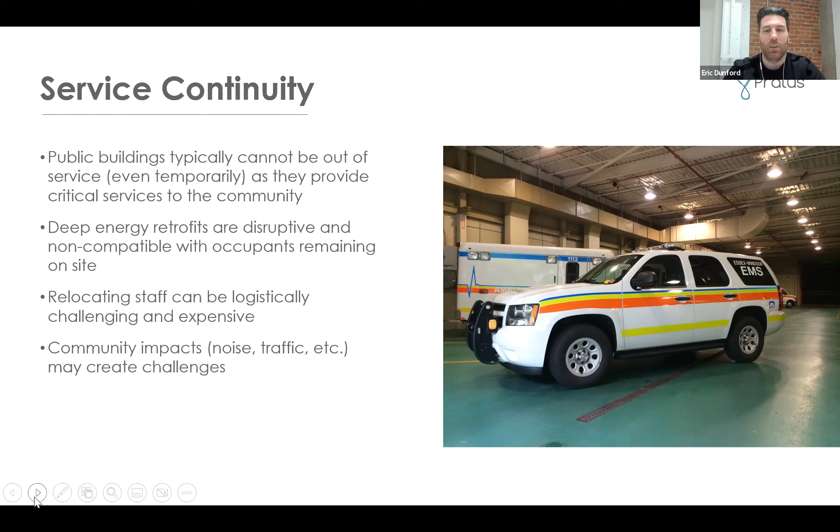But when you look at something like a police station or a fire station, we don't have a lot of options there in terms of disruption. So we have to be very careful about how this is deployed. And of course, as well, these projects do have noise. They do have construction sounds. They do create traffic challenges. So there are also just impacts to the community overall.

The other one that we would be remiss not to mention is that public structures are usually very interesting structures. They're old structures, they're beautiful structures. Some of them are very historic. And so some of these buildings by design have not been changed in a long time. And it would be very difficult to change the aesthetic appearance of them because they have that place in the community; it's really a touchstone to our history.

And I'm showing you here one of my favorites, which is the Stratford City Hall. And just looking at it, right, that's architecture you don't see in Canada very often. And it's a very striking part of the downtown core. So how would we look at a building like that and find ways to decarbonize it that would still keep that appeal, that charm? And that's really important.

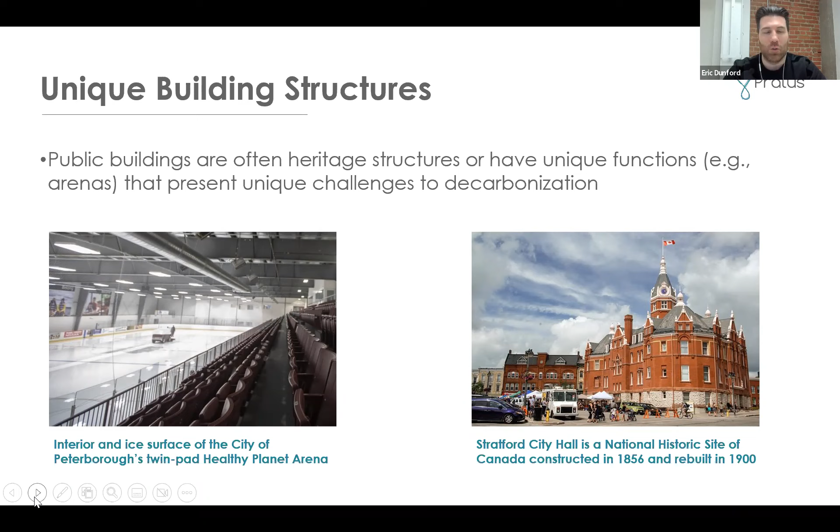The other part, and this is my hometown here, which is Peterborough. And you can see here, this is one of the hockey arenas in Peterborough. And this is a twin pad ice facility. And many of you, I'm sure, in your communities have very similar facilities or pools or gyms or whatnot. And these facilities have very different facility needs because they're offering services that a regular building does not offer. So they have different cooling needs, heating needs; balancing those energy draws is just a little bit more complicated because of the structure and how they are used.

And finally, one that I think everybody should appreciate, we're talking again 2028, 2030, these timelines are soon. And we already know we are struggling with things like skilled labor, with funding, with equipment, with materials, and there's a competition. And so many of you are peer municipalities, but in a way you are also in competition with each other for access to these sorts of brains, hands, materials, all the things needed to make these changes.

So keep that in mind, that the longer we delay, the more competition there's likely going to be for some of this work, because we just really are at the dawn of a lot of this work, and a lot of those skills don't yet exist in our society, and we need to very quickly change that. I would say, personally speaking, that on the sustainable design side, the challenge used to be money. Just getting the money was the hardest part. Now the challenge is getting the bodies. And I think that's a really important thing to consider here in Ontario.

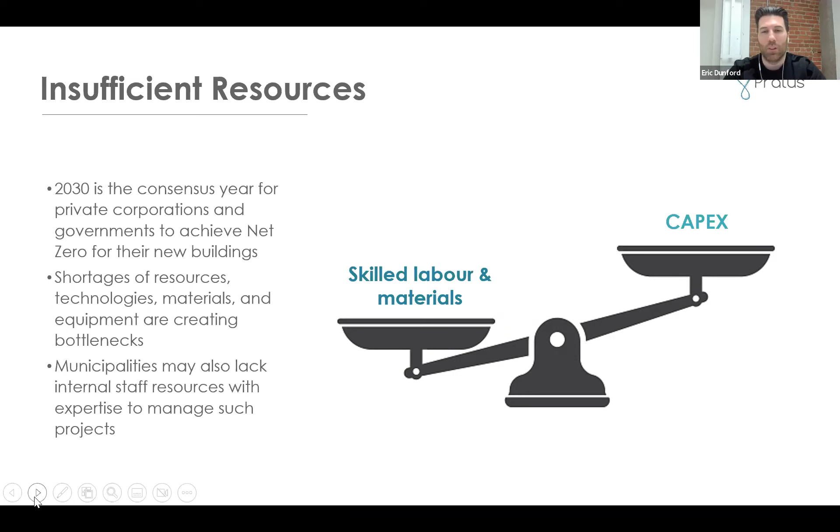So let's talk. I know one of the questions was about available funding and resources, and this is not an exhaustive list, but we did want to speak to what are some tools, what are some funding sources that might help spur your community or give you a place to start. And one of the strongest, best programs that has been in Canada for a long time is the Federation of Canadian Municipalities. So this is a federal entity whose sole job is basically to support communities across Canada in deploying projects and services that are going to help reduce the environmental impact of operations.

So the Green Municipal Fund currently has a $1.65 billion endowment from the Government of Canada, which it uses to dole out loans and grants. So if you've not been a recipient of a program from GMF, I would be surprised. I think most communities have accessed this in some way or another, but there is an energy sector.

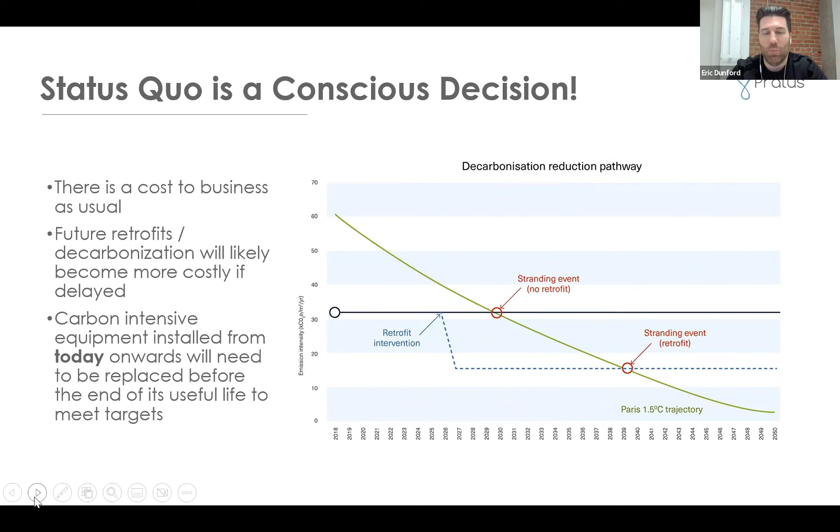So again, just keep in mind that it's not like we're looking at a net plus or a net new cost for these things. The status quo is not free. It needs to be considered and compared for all of these options. And that's something that our councils, our elected officials need to understand as well: the question isn't between doing nothing and doing something. The question is between just repeating the same process and approach, and maybe perhaps errors we've made in the past, or considering different alternatives that offer better value.